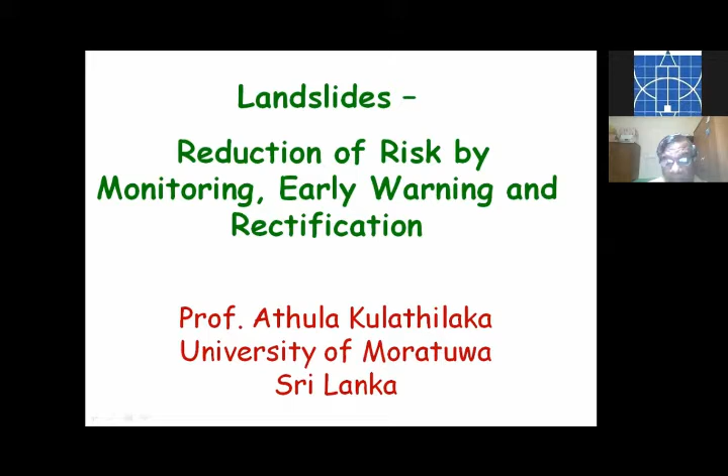A landslide is defined as the movement of a mass of rock, debris, or earth down a slope. These movements are generally inconvenient and could be of disastrous proportions, leading to loss of life in certain situations. They are a source of concern for geotechnical engineers and engineering geologists, so we have to find solutions for that.

These mass movements can be subdivided into three categories from a mechanistic point of view, for our analysis: slides, flows, and falls.

In a slide, the moving mass comes down with a discrete boundary shear surface without any disaggregation inside. As one unit, it comes down with less internal deformation, and it can be translational, moving in one direction, as seen here. Long infinite slopes may fail like this due to heavy rainfall, or at bridge abutments and in reservoirs due to drawdown of the water level.

You can see this kind of shallow translational slide here in Samanalawewa reservoir. It can also be rotational, with a circular or compound surface having both circular and non-circular components. So that's the different forms of slides.

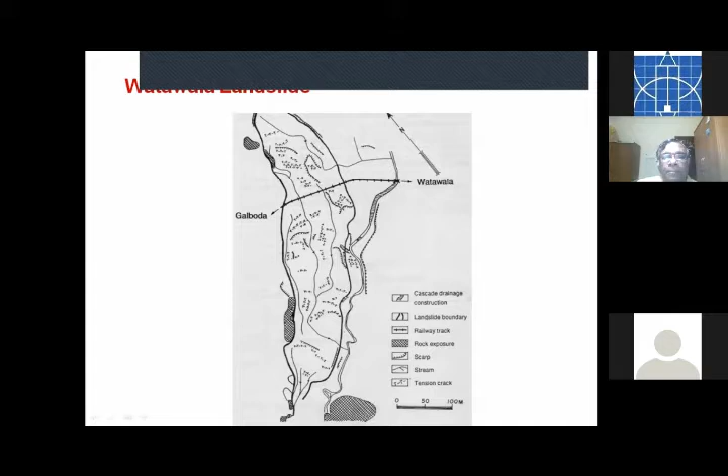So this shows the landslide boundary identified by numerous investigations and the railway track there. The railway track was getting disturbed by this slide, and this is the identified failure surface. This mass was moving down due to the rise of the groundwater table during the rainy season. It started around the 1950s, and year by year it has gone down directly without full disintegration, and this movement is causing subsidence in the rail track and things are getting disturbed. So this was rectified in 1994.

I will talk about it later, but what I'm illustrating here is this is a slide. It is moving down with the whole mass being intact.

In the case of a flow, the material becomes disaggregated and the mass moves down without concentration of the displacement at the boundary. So one that started as a slide can propagate and the whole mass can flow down as a debris flow. That is what happens in Sri Lanka in most of these rain-induced landslides.

In a fall, it is a toppling mechanism. It falls normally from the steep face of the soil or rock, with immediate separation. So the debris is collected and can come down as a flow.

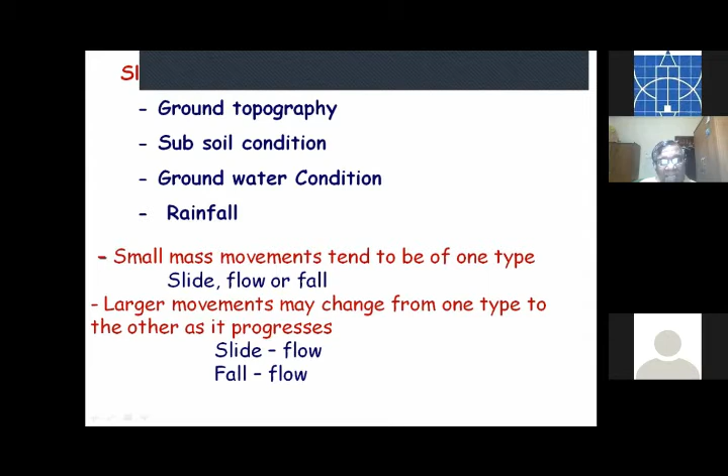The type of instability mechanism that could take place in a particular slide will depend on the ground topography, subsoil condition, groundwater condition, and rainfall. Small movements can be of one type - it may remain as a slide, flow, or fall. But in large movements, what started as a slide can end up as a flow. Falls, debris collected by a fall, can come down as a flow. As I said already, in all the rain-induced large catastrophic landslides in Sri Lanka, it starts as a slide and ends as a flow.

The analysis - as engineers, we have the responsibility of analyzing these situations and coming up with certain numbers. There are two approaches that can be used to analyze the stability of a slide. We can do it deterministically by calculating a factor of safety.

There are two approaches, the limit equilibrium approach and the finite element approach. Limit equilibrium approach is the one most widely used. There we have to assume a potential failure surface. In the finite element approach, we don't have to make such an assumption. We do a stress analysis and come up with the factor of safety. I will elaborate now.

In the finite element analysis, we discretize the material into certain elements and assign the appropriate constitutive laws for the different soil strata, then simulate the construction. It may be building up of a slope or excavation in the ground to make it a slope, or in the case of a natural slope, you can do a gravity turn-on analysis. With that, we calculate the deformations at the nodes and the stresses in the elements, and we can graphically present that as stress contours or displacement vectors in this form.

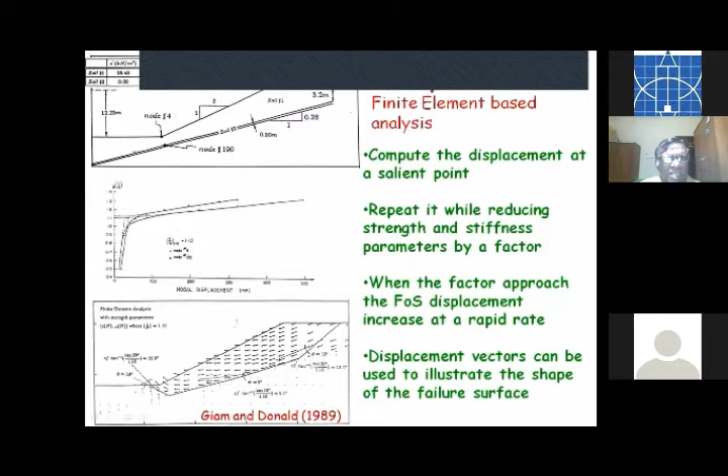If you check the displacement vectors corresponding to that stage, you get vectors like that. By encompassing the large value vectors, you can see that is the potential failure surface in this soil where there is a weak layer. Previously I showed a case of uniform material. Here, with that weak layer, the potential failure surface is not circular - it is of this type, a wedge type surface. Now that understanding is important when you go to talk about the limit equilibrium approach.

In a limit equilibrium approach, we have to assume a trial failure surface, which can be circular or non-circular based on the subsoil condition, and consider the force and moment equilibrium. There are different methods available, Bishop's, Janbu's, and all that.

In the Bishop's method, we can consider only the moment equilibrium, but the other three methods can go for both moment and force equilibrium. In Bishop's method, we can assume only a circular failure surface, but in these other methods we can assume other forms of failure surfaces as well.

If we assume the failure surface to be circular, a circle can be defined by a center and a radius. We can change the center along this grid and assign different radii, and the program will analyze and come up with the critical failure surface, with a factor of safety of 1.16. But if we account for the geological situation and let the program analyze non-circular failure surfaces, the answer is 0.742. So this is the correct answer.

So by not properly making that judgment and not directing the software to do the appropriate type of potential failure surface analysis, we can end up with gross error in our final calculation. It is very important to make that engineering judgment so that the software can play its role.

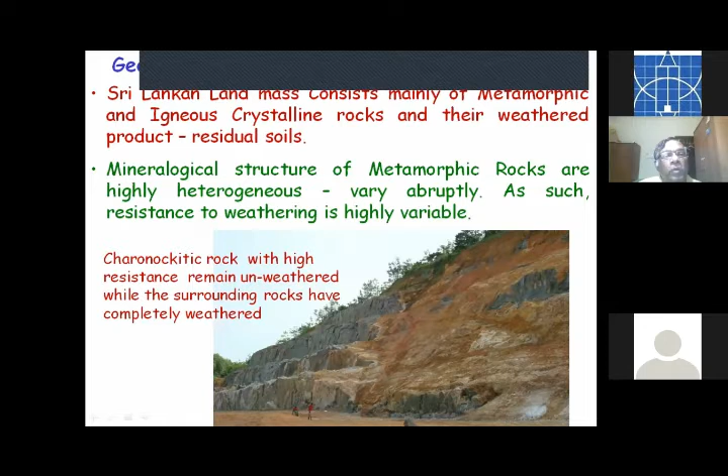So in a slope, Charnockitic rocks, which have high resistance to weathering, can remain unweathered as you see here, while all the surrounding rocks of other types have completely weathered. An even more variable situation can be seen here.

There are Charnockitic rocks in here, and these gneiss rocks have weathered into a lateritic type soil. Then the rocks with high feldspar content have weathered and formed this whitish clay material, which is highly erodible and quite sensitive.

So such highly variable situations can be seen in the sloping ground in Sri Lanka. Unfortunately, all these cannot be detected by a few boreholes, so when the top is exposed, only then are all these complicated situations revealed.

In these rocks, we can have joints, as seen here, a jointed rock with closely spaced joints. When the rock weathers and the weathered product remains at the same position, these joints will remain as relic joints. So the presence of relic joints can also lead to critical situations in a residual soil.

As we discuss now, our landmass consists of colluvial soils - that is, if a residual soil has come down due to a previous landslide and deposited somewhere, we call it a colluvial soil, which is particularly weak material. Then there are residual soils remaining intact at the position of the parent rock, and rocks of different levels of weathering. So all sorts of these combinations can be present in a slope.

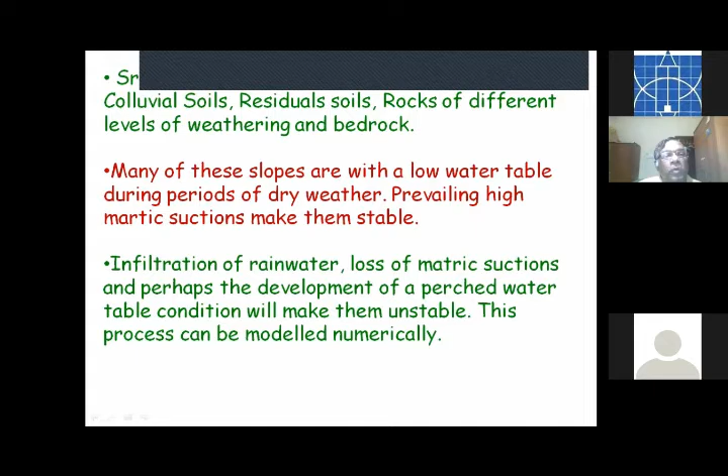In many situations, during the dry period, the groundwater table is low. Therefore, in the unsaturated soil, there are high matric suctions. With the infiltration of rainwater, these matric suctions are lost, and perhaps a perched water table situation can develop, which can make the situation become unstable. I will elaborate on it in a few slides.

This is a steep vertical cut done in the Kandy Road at the Kegalla bypass. This is soon after the cut, back in 2014, and it is looking very nice, not yet exposed to any rainfall. Soon after, with a few rainfalls, it has failed. So this is the failed position.

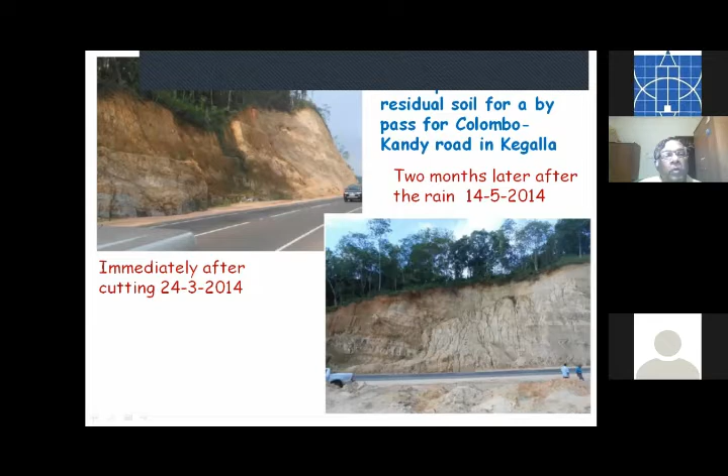Talking about the fundamentals of unsaturated soils - in a saturated soil, you have only solids and water.

A water molecule at the edge of the boundary has an unbalanced force towards the water, so that creates a tensile pull in this contractile skin. Inside, the water forces are balanced. So this tensile pull makes a difference in the air and water pressure.

Air pressure is generally greater than the water pressure. Air pressure is atmospheric, so the water pressure is less than that, in negative.

In the soil mass, the spaces in between the particles can be considered as interconnected capillary tubes. So this surface tension effect has a compressive force on the walls of the capillary tube, that means on the soil surfaces. So that compressive force is generated by the surface tension, that capillary action.

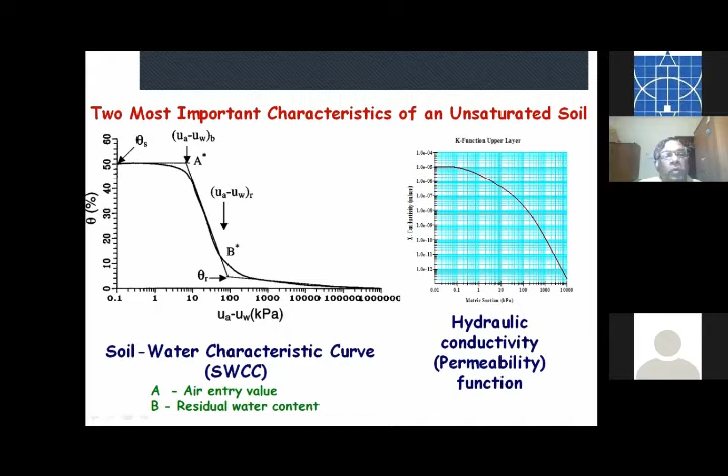We have done that for different types of soils in Sri Lanka, and the variation of permeability with matric suction can be found experimentally or can be related to the soil water characteristic curve. So when we model the seepage, the flow of water, infiltration of water into a soil, these two characteristics are very essential.

Here I show you some results of such modelling. This is a typical cut slope taken from typical southern expressway slopes, and this is the groundwater table. Over here, it can be either uniform soil or soil overlying a layer of rock. I have considered these two situations.

This is the case where you saw highly non-uniform conditions in these slopes, but we cannot analyze such a situation with all that complication, so we'll have to idealize it as a uniform slope.

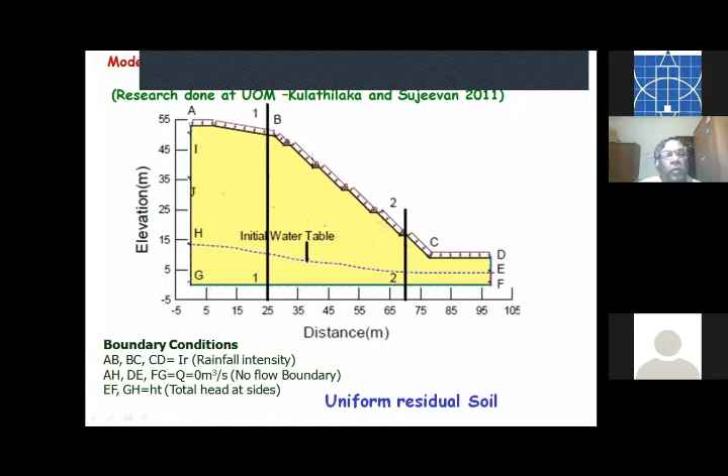So that is the groundwater table, and infiltration into that is modeled. In this case, there's a rock layer underneath that residual soil layer, with a 5 millimeter per hour rainfall occurring over a few days.

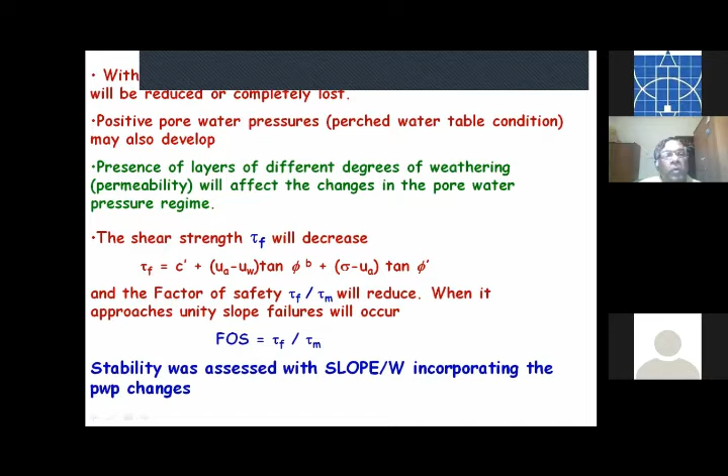So with that, I illustrated how the pore pressure regime changes, how the matric suction is lost, and the perched water table conditions may develop during rainfall. The shear strength is given by this particular equation. With rainfall, UA minus UW is reduced or lost, and positive pore pressures can develop. Therefore there is a reduction in tau F, and the factor of safety will reduce. As time progresses, under different intensities of rainfall, there is a reduction of the factor of safety, as illustrated there.

In a slope made to a gradient of 1 to 1, if you flatten the slope to 1 to 1.267, still this infiltration causes the reduction of factor of safety. So lowering the slope angle is not the answer to this kind of situation.

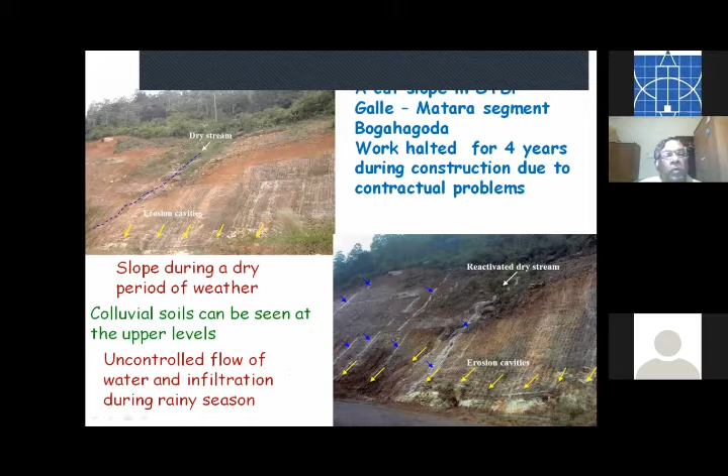So these are the potential failure surfaces, and this is the practical situation that occurred in the Southern Expressway. This cut was made in the Galle–Matara segment, and due to a contractual problem, work was halted for about 4 years, so no drainage measures were implemented. There was water moving down the slope and infiltrating into it. You can see some colluvial soils there, whitish clay soils over here. So this was going on in an uncontrolled manner for a few years.

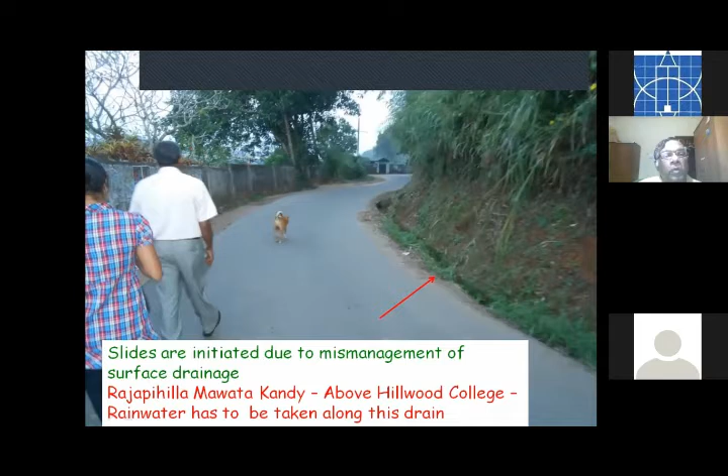This is another interesting situation, a slide that took place due to mismanagement of drainage in Kandy, Rajapihilla Mawatha, where Hillwood College is down there. The surface of the road is cambered so the rainwater flows along it, but at certain places it is not properly maintained and there is not enough capacity for drainage. So the water flowed onto the other side of the slope, and the water flowing into that disturbed the soil and infiltrated into it, causing this failure.

So this is unstable. This debris has to be removed, and for the safety of the school, the slope had to be rectified with soil nailing, spending more than a few millions of rupees, which would have been avoided if proper attention had been paid to the drainage.

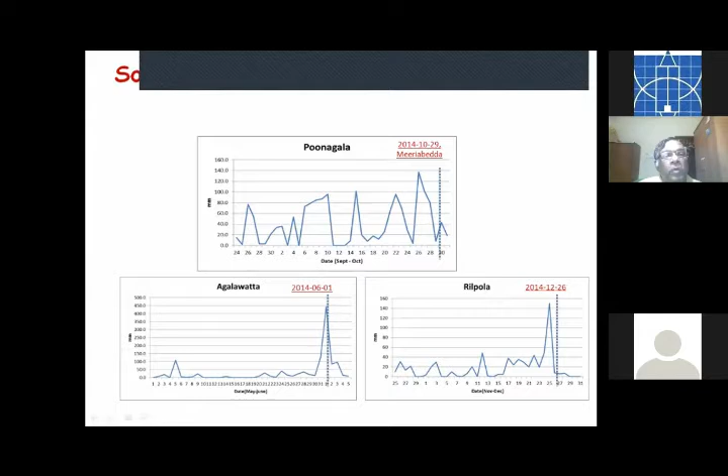In natural slopes also, we are all aware that major failures take place during periods of heavy rain. This corresponds to some such failures, the rainfall record, and the failure took place on this marked day. This is one such situation in Meeriabedda, the initiated failure. This is a famous failure causing many deaths, and that is where the slide started, the initiation of the slide.

So what do we do with the landslide? What are the possible actions? One thing is avoidance: we have identified the suspected area, don't go there, just leave it alone. But that is not always possible. The other possible mode of action is acceptance, to live with the landslide - get to know that there is a landslide and live with it.

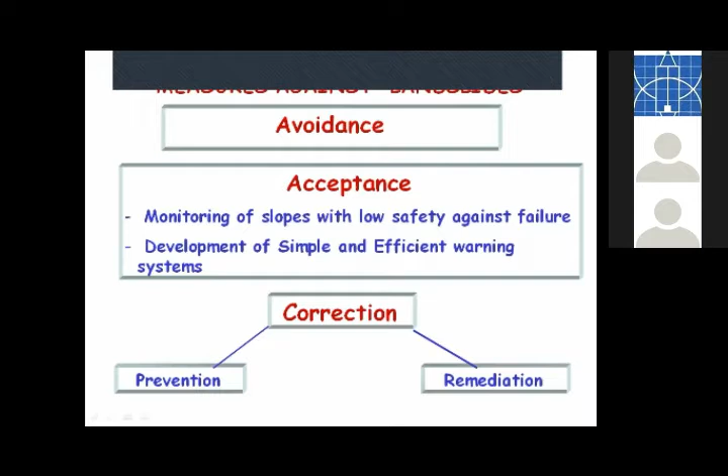If we can rectify each and every landslide, that is the best situation. But when it is not practically feasible, we'll have to live with that situation.

NBRO is the government agency dealing with landslides in Sri Lanka, and they have various strategies in landslide risk management. I work very closely with NBRO in many of these activities. The first activity is the identification of hazards, the zonation map, the landslide susceptibility map, which I will elaborate on shortly. Then they are involved with landslide monitoring, early warning, and awareness campaigns. In major projects, landslide risk assessments are done, and there are investigations and analysis for mitigation in special projects.

Talking about landslide hazard zonation mapping, we consider the possible reasons contributing to landslides, like bedrock condition, bedrock geology, soil cover thickness, soil type, slope range and angle, hydrology, land use, and land forms. These different contributory factors were given different weightages based on expert knowledge and various statistical principles, and combined to form a hazard zonation map.

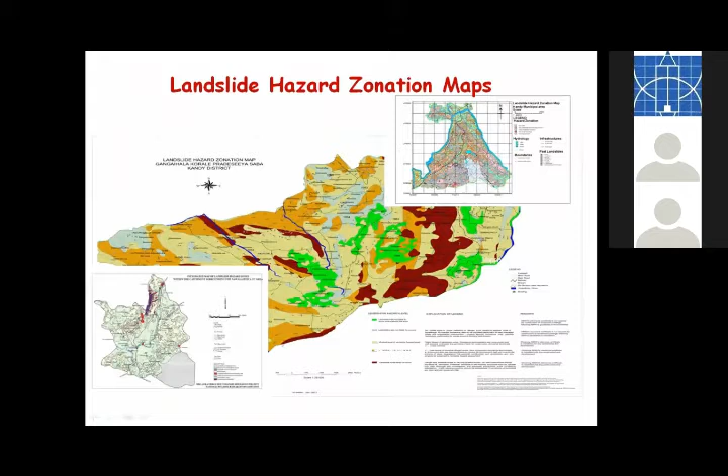This is a particular hazard zonation map, with different hazard levels marked in different colors. Taking this one for the Aranayaka area, the famous Aranayaka landslide, this is the identified high potential zone with high susceptibility to landslide, already identified, and this is the marked flow path of the debris — the area under risk. Earlier, with the Meeriyabedda landslide, I showed you that path under danger. So from the hazard susceptibility maps, risk maps are to be developed, identifying those areas under risk, and that is currently being done.

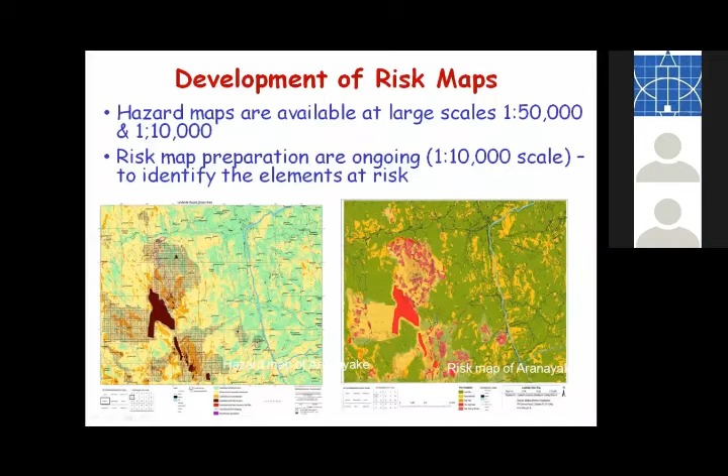Then there's monitoring. For monitoring of landslides, real-time forecasting is an important aspect, and rainfall is the main triggering factor. There are now 325 automated rain gauge stations stationed in many of the critical parts of the country. The rainfall records come automatically to NBRO and are then shared with the Disaster Management Center.

Based on the rainfall, for identified susceptible zones, alerts are issued. Initially, alert is at a rainfall intensity of 75 millimeters per day, warning at 100, and evacuation is recommended with 75 millimeters per hour or 150 millimeters per day values. These numbers were arrived at based on past experience and various statistical information.

As we discussed earlier, this threshold rainfall value for a slide at a particular location is site specific. We have to do a detailed analysis of the site to find the threshold rainfall value, but such an analysis cannot be done for every suspected slope. So there is general guidance, but we can do more detailed analysis for identified critical slopes. Now we are going to start a research project to get threshold rainfall values in certain identified regions and to predict the flow path as well.

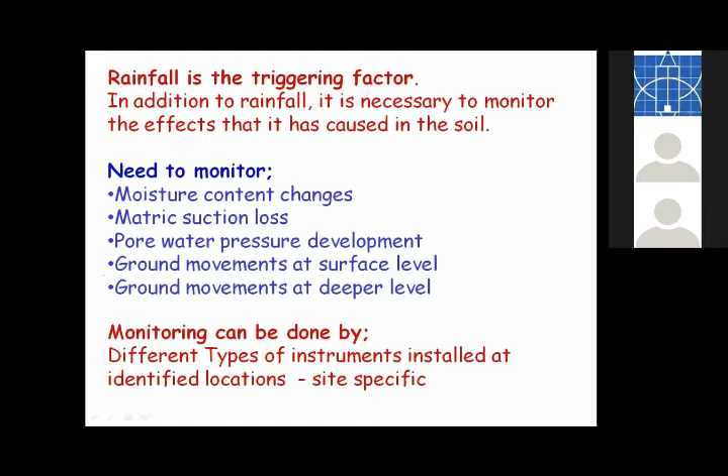In addition to rainfall, it is necessary to monitor other parameters — the effect rainfall has on the ground. With infiltration of rainfall, as I showed, moisture gets into the soil, moisture content changes, there is loss of matric suction, pore pressure develops, and there are movements at the ground surface and at deeper levels. All this can be monitored with various instrumentation. At a potentially hazardous site, you can identify the different soil layers where it is problematic or critical, and install these instruments at appropriate locations. I will elaborate with some figures.

To measure the temperature change of moisture content, you have the moisture sensors. Then to measure the pore pressure, the matric suction change, tensiometers, piezometers, and to measure the ground movement, we can have extensometers, tilt sensors, and strain gauges.

In all these, the data can be acquired electronically and transferred to a control station without visiting the site. So you can monitor the slope from the office if proper instrumentation is installed. Then there are inclinometers which are capable of identifying the failure surface at a deeper level. I will elaborate on that as well.

Most appropriate way is through a piezometer. In our residual soil formations, there are soil layers of contrasting permeability, so the pore pressure development and dissipation in these layers will be very different to each other. So it is necessary to identify the pore pressure at different layers. We need to install at a critical site pore pressure piezometers at different levels.

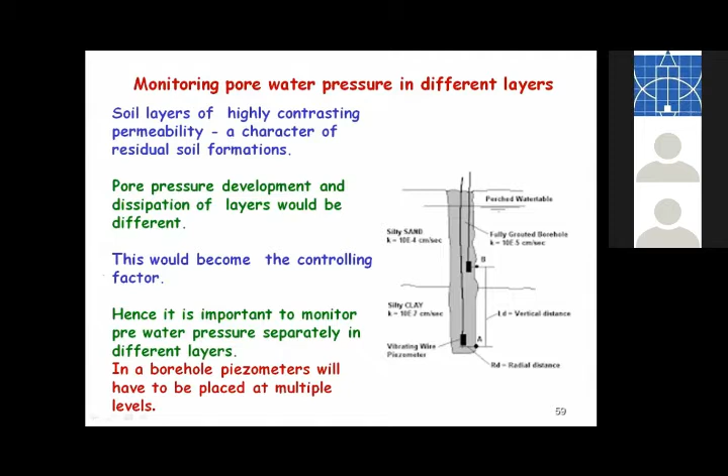Piezometers can be of different categories. The simplest is the standpipe or Casagrande type piezometer, where you have a porous tip or a perforated tip, and with the rise of the water table, the water will rise along that to balance the pore pressure at the tip, so you have to measure the water level through a probe that is pushed down. There is some time needed for water to move into that, so the response is slow.

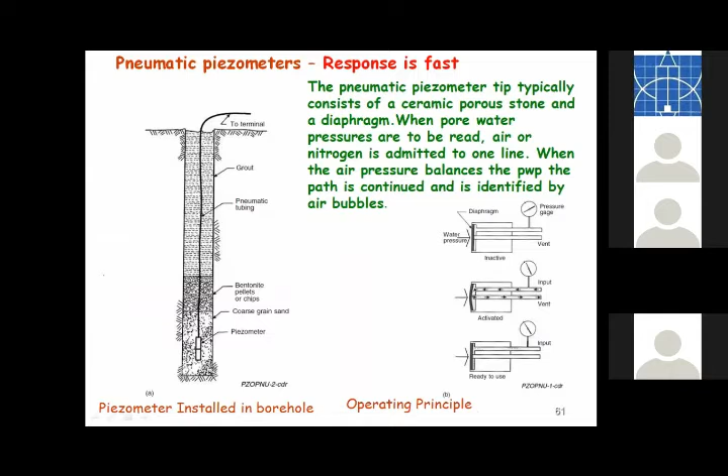There are other devices like the pneumatic piezometer. The response is much faster. There is a porous stone and a diaphragm, and when you want to measure the pore water pressure, nitrogen or air is entered at a certain pressure, so that will open up the diaphragm and it comes back, and you can record the pore pressure. So there is no need of movement of water, so you can get the pore pressure measured rapidly.

In a vibrating wire piezometer, again, there is a filter and a diaphragm, in contact with the pore pressure regime. The water pressure measured there has an impact on the diaphragm, and it changes the length of the wire and its resonance frequency. So it is picked up by a signal and converted to the pore pressure. All these will react very fast and are ideal to monitor the pore pressure building up and dissipation in a landslide situation.

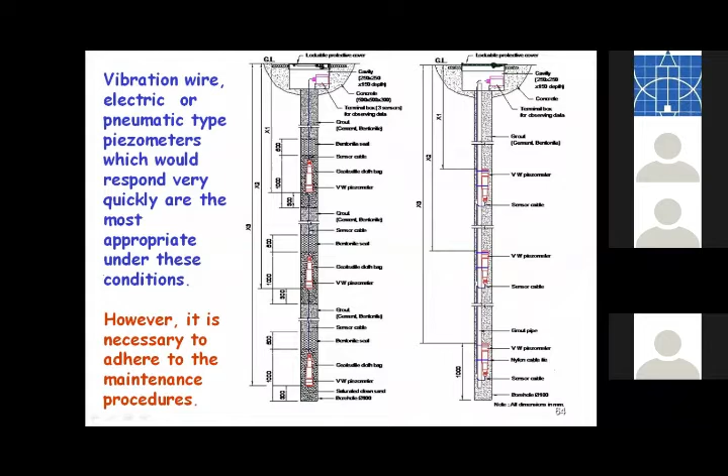So in a borehole, with different soil layers identified, you do a site investigation, identify different soil strata that can be critical, so the piezometers can be installed at different depths.

The other point that we were talking about is the matric suction. The matric suction is measured with tensiometers, so that negative pore pressure can be measured directly, or you can measure some other parameters related to it. When we measure the matric suction directly, we call it the tensiometer, and conventionally we can measure up to about 100 kilopascals matric suction directly.

In a tensiometer, we have a porous tip, a high air entry disk, and that gets in contact with the soil with that negative pore pressure. So that soil tension will have an impact on the diaphragm, and that effect is measured by the devices here. There are devices of different content: the reservoir is small, and this is the tensiometer that we use in our research work. There's a large water reservoir.

In all these situations, it is very important that you prevent air from entering. In the unsaturated soil, there is air; entrance of air should be prevented. So you have to have a high air entry disk. If you expect 200 kilopascal matric suction in a soil, you need to have a disk with air entry value greater than 200, so air cannot enter.

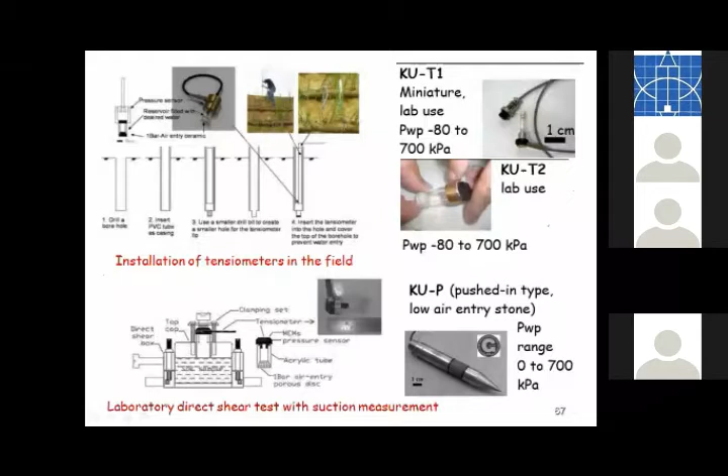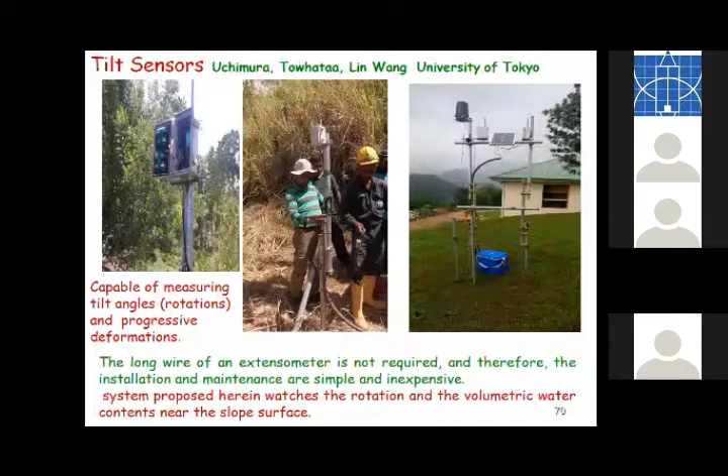A tilt sensor is a smaller, simpler device used for this purpose. You can see this instrument installed at a shallow depth. It is capable of measuring the tilt in the surface and the progressive deformation, and the data can be transmitted electronically. Volumetric water content measurements are also generally installed here.

You can see the installation. So the tilt or deformation and the water content change can be transmitted electronically to the control station.

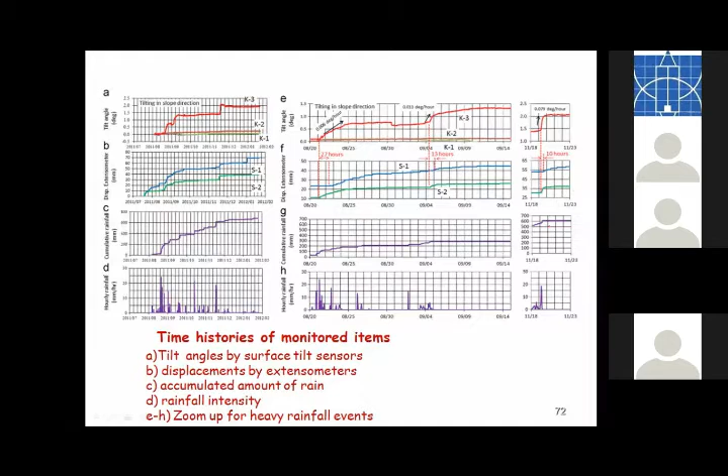So this is a certain result. With this heavy rainfall indicated here, in a tilt extensometer, large movement has been initiated. In a tilt sensor, large movement has got initiated due to this rainfall. So when we have these instruments located at appropriate positions, along with the measurement of rainfall, we can connect them up and see whether the movements have initiated or whether there is a danger of a slide.

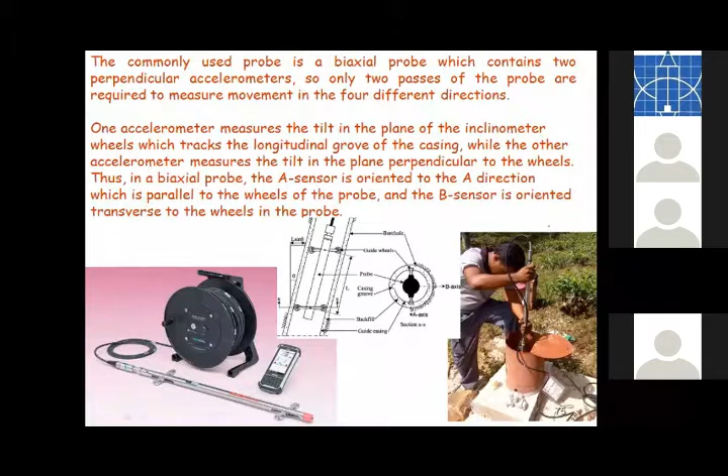So this is the probe, and that is the inclinometer tube with two axes of movement. This person is lowering it into the inclinometer tube within the borehole and identifying it. The change of angle can be identified and transmitted electronically to the top, and you can identify how the changes are happening - the deviation from verticality can be identified.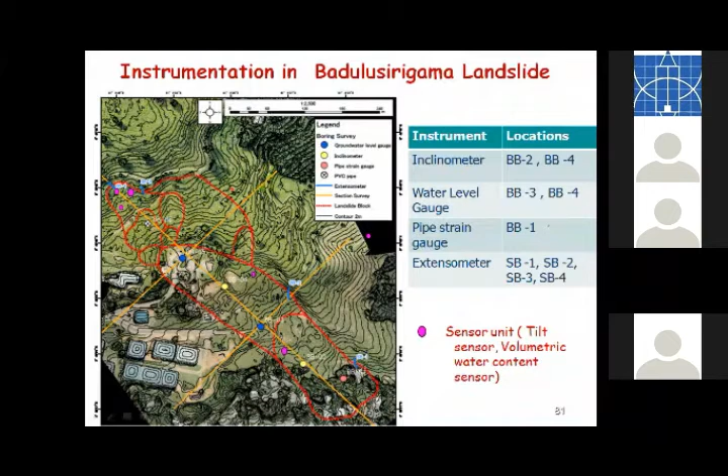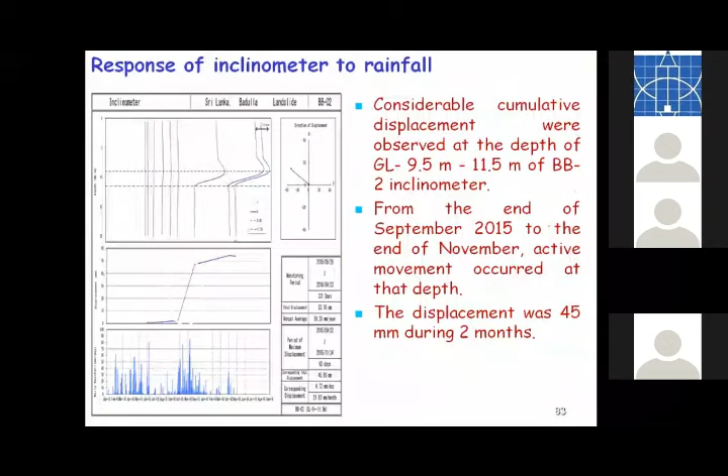Large deformations were identified in the extensometer. And in the inclinometer, with this rainfall, you can identify that deformation happening. In the strain gauges, you can see with that accumulated rainfall, the deformation - it is straight here, but the deformation started after the rainfall.

So that is site-specific monitoring with installed instrumentation. There is a global way of doing that using satellite data - the interferometric synthetic aperture radar, InSAR technique, which has been used to identify the global variation of deformation. By using images taken at different time intervals, a three-dimensional terrain model can be generated.

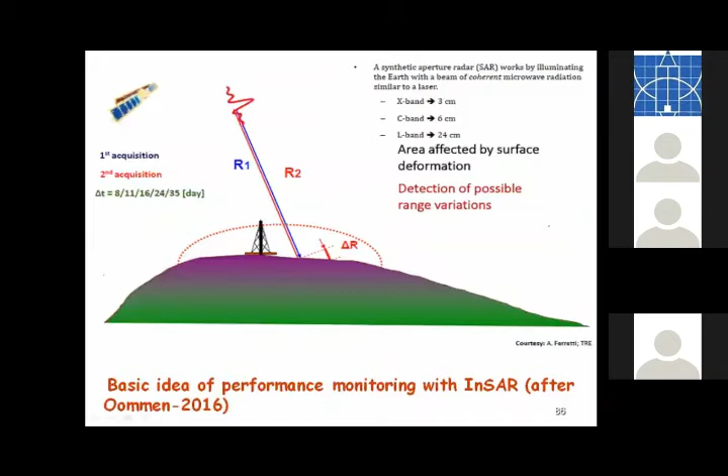Aerial photogrammetry is another tool that can be used here. We take photographs with more than 60% overlap. Two overlapping photographs can be used to create a three-dimensional model of that area. Nowadays we have drones taking digital photographs and combining these overlapping photographs in an analytical photogrammetry exercise with various software, you can create the three-dimensional ground model at periodic time intervals, and you can see what changes are happening in between.

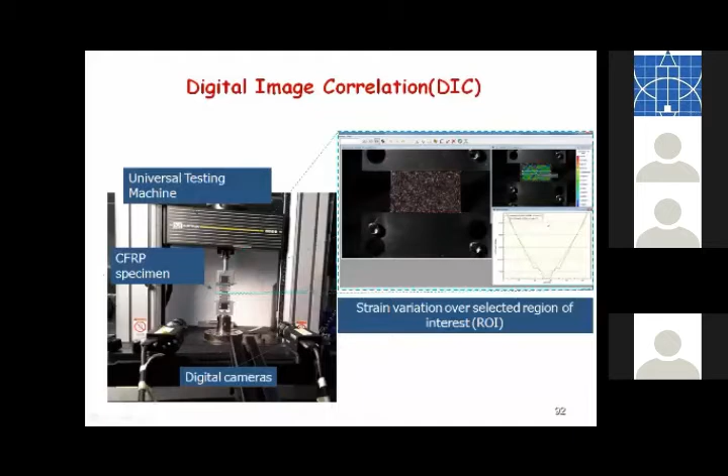Terrestrial photogrammetry is where the photographs are taken with the horizontal axis. On a sloping ground, you can take photographs with the horizontal axis of the camera overlapping and create a three-dimensional ground model, doing that periodically to find out any deformations within a certain time period. That technique is used in structural engineering - here a thin element is loaded and watched by two cameras. Using this, you can create a three-dimensional model of the deformation of that element. So without fixing strain gauges, which will influence the behavior, you can watch it with the two cameras and a three-dimensional model can be created of the deforming object, and necessary analysis can be done.

Right, that's about the monitoring.

So if we find the landslide is taking place, what can we do? How can we rectify it? Terzaghi says we have to attack the actual cause of the slide. So it can be done by modification of the slope geometry, drainage, retaining structures, and internal slope reinforcement. In modification of geometry, we may remove material from the sliding area and add it to the toe, or change the slope geometry.

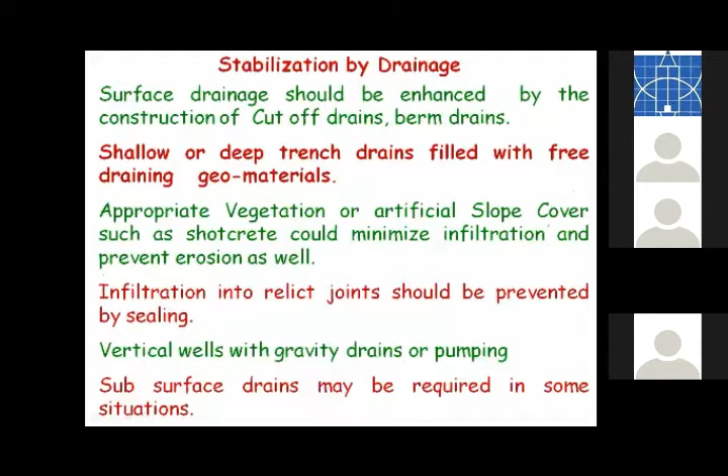But in our situations, mostly these landslides are caused by rainfall, so therefore the focus should be on reducing infiltration and getting the pore water out. We have to focus on improving surface drainage and subsurface drainage. Surface drainage can be improved by cut-off drains and berm drains. At shallow levels we can use trench drains, or infiltration into relict joints must be minimized, and subsurface drainage may be required in certain situations.

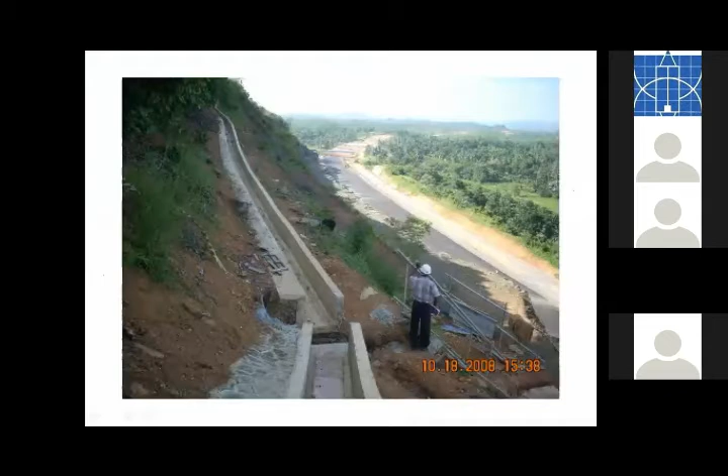Here again, an illustration of a berm drain connecting to a cascade drain taking water down - this is to prevent splashing of water into the rock. This is another critical location in the Southern Expressway. So there are these berm drains, and there's a lot of water coming from further up the slope, right? So there are these cascade drains coming up.

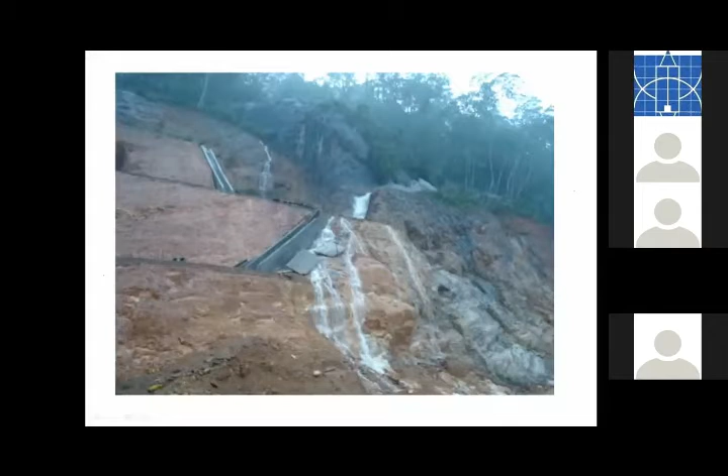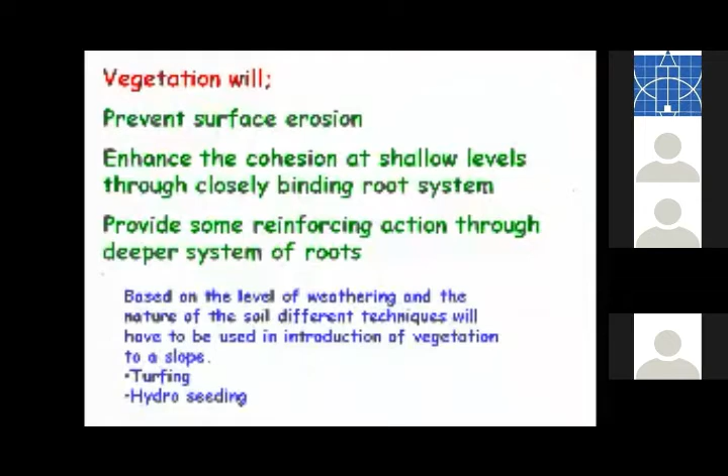So the vegetation can be introduced by turfing or hydroseeding. These are some such exercises. Hydroseeding, and this net protects it till the seeds are grown. Turfing, when the level of weathering is quite high, turfing may be successful.

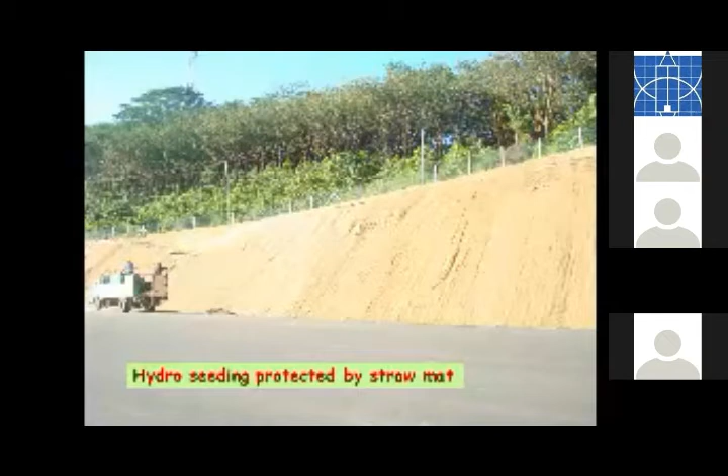This is again hydroseeding. Hydroseeded, and that is covered with the straw mat, and they are doing the watering, and little by little the plants are grown. So now you don't need the straw mat; it is capable of providing the erosion protection.

So in many cases, the surface drainage may not be sufficient. We will have to go for subsurface drainage measures. We may have trench drains, like that.

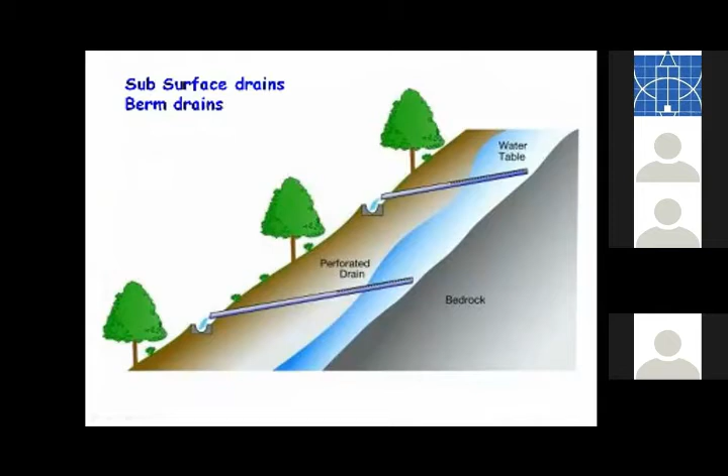And these kind of sub-horizontal drains, pumping wells. Sub-horizontal drains drilled to a particular distance with perforated pipes. Water here is captured by that and finds an easy path. So we'll have to install them at regular horizontal intervals.

Sometimes we may have to do things like a drainage well, then drill in different directions and install wells as shown here. So depending on the prevailing situation, we have to find the appropriate way of installing the drainage.

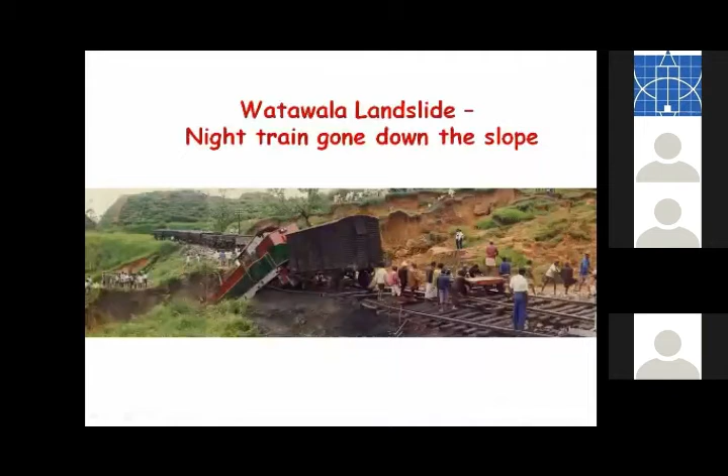In the Watawala landslide, which was stabilized completely by drainage measures, there were surface drainage measures, pumping wells, and in the long term, directional drains under the identified potential failure surface. So these are the surface drains, pumping wells. These are photographs taken somewhere back in 1995.

And then, more importantly, this is the identified failure surface which I showed you earlier. During the rainy season, the groundwater table level will rise up to that due to the rainfall. So then movements will initiate along that.

So the movements there have happened over a long period. The shear strength has come down to residual. So that is the potential moving line, the one which has to be protected. Therefore, the subsurface drains were taken just underneath that.

Now that is too long, about 35 meters deep, so you can't have one directional drain. You have to handle the failure surface. So the directional draining technique was used.

Subsurface drains were taken along that path, and to cover the planned area, there were 13 such drains done. In those drains, HDPE pipes, which have high resistance to deformation, were inserted. There are perforations from region to region, allowing the water to come in.

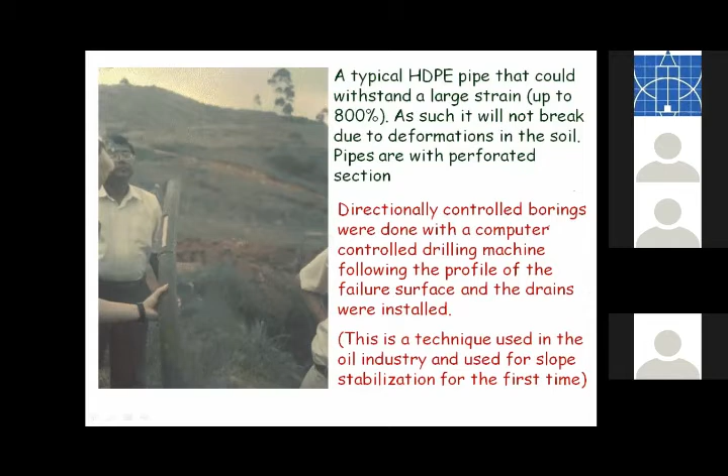And so this is the drilling technique used, and that is the outlet of the drain. Photographs taken in 1995, soon after the completion.

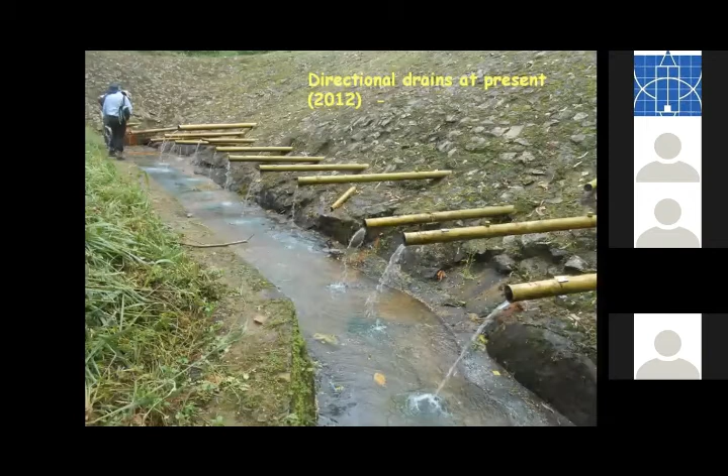And this is the situation of photographs I took in 2012. So they are still in operation. There are some complaints of blockage, but yeah, it is still in operation. There are, of course, some issues to be answered. This is one of the pumping wells and the railway track.

In the Budulusirigama landslide, which is again rectified by drainage measures alone, this is the identified surface that I showed you before.

Through investigations, 3 potential failure surfaces were identified: the lower one, middle one, and the upper one, and also they can be combined to make one composite failure surface. So these are the drainage measures implemented.

Blue lines are the surface drains, and then at different elevations, fan type drains were done. From one location, drains were done for about 40-50 meters in a fan type orientation, and the water is collected, then taken away.

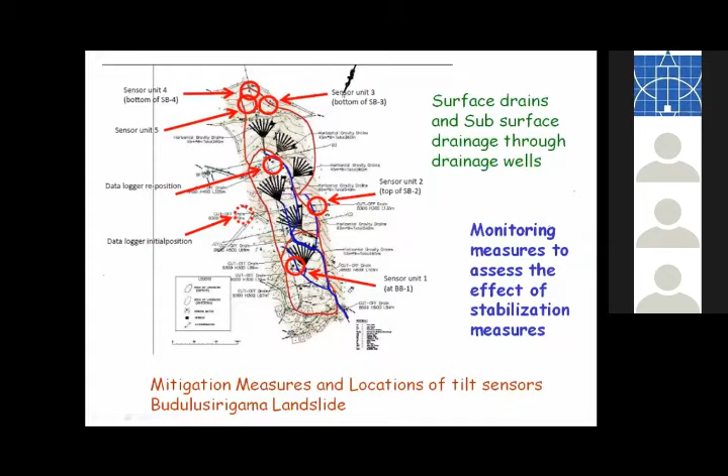Now, this is the measure of the surface drainage, and these are subsurface drains. A number of the water collected from those fan type subsurface drains were collected and taken away.

Now this was modeled in the master's work, Nilanka's thesis, and these were the different levels where these things were installed. It was idealized into a 2D situation, and the installation of these drains and the drainage of water away from those drains was modeled.

And now in here, there were no other activity, only the installation of drains, so no cutting or filling activity. So they could have been installed starting from the bottom going up, or starting from the top going down.

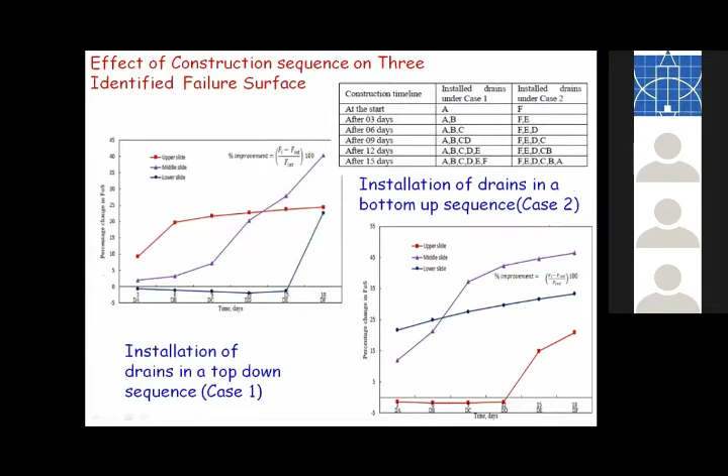So we investigated 2 possibilities. If we do a top-down construction, the factor of safety of the 3 identified failure surfaces, the top one enhances first, and the bottom one enhances very late. If you do a bottom-up construction, the lower failure surface gains factor of safety very fast, while the upper one happens much slower.

If you consider the composite failure surface, top-down construction brings it to that value. Bottom-up construction brings it there too, to the same value, but in the bottom-up situation, you can see the factor of safety gain is faster. So if you start installing drains from bottom up, the factor of safety is gained faster.

Then after that, we impose a critical design rainfall on this rectified slope and check what will happen. That is the rainfall record. You can see with this rainfall, there is a drop in the factor of safety in all 3 potential failure surfaces, but with the cessation of the rainfall, factor of safety is gained fast. So it has not led to a value less than 1.

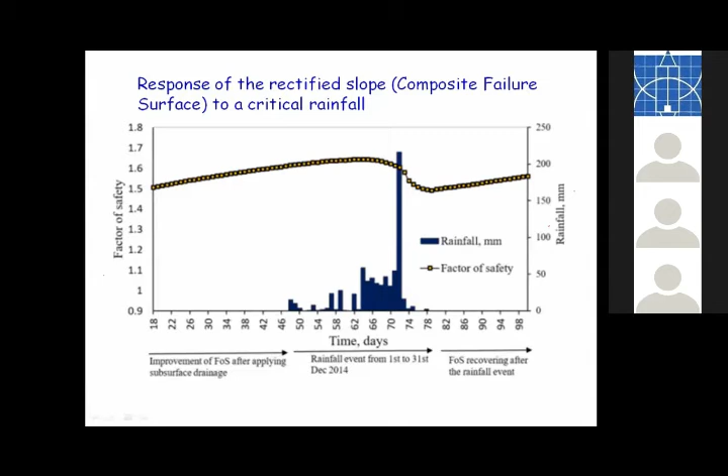With the composite failure surface, again that was checked. This is after the installation of drains. When the drains are working, factor of safety is picking up, and with the rainfall, there is a drop, and it is picking up again with the cessation of the rainfall. So you'll have to do this kind of analysis to see whether a rectified slope is capable of handling this failure.

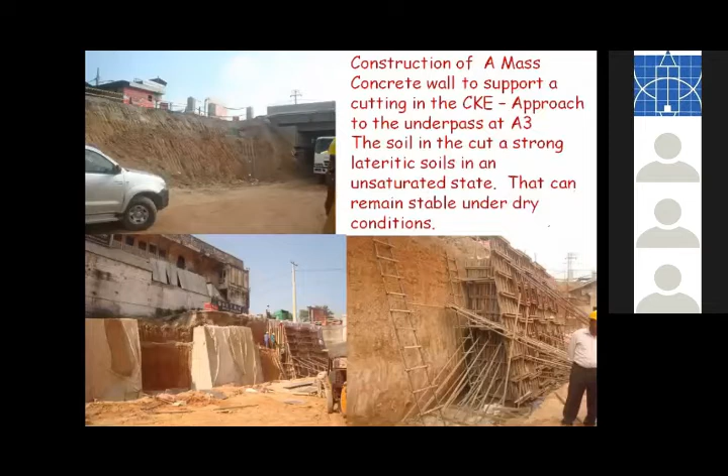In certain situations, in addition to the drainage measures, we will have to have various kinds of structural interventions, like this steep cut slope. It is necessary to have this gabion wall here to protect it, in addition to the drainage measures. Now, in this situation, in the Colombo-Kattunayake Expressway, this steep cut is done, which is very stable during the dry season, highly hard lateritic soil, but you cannot guarantee the safety during the periods of heavy rain. So the excavation is done segment by segment, and this mass concrete retaining wall was constructed.

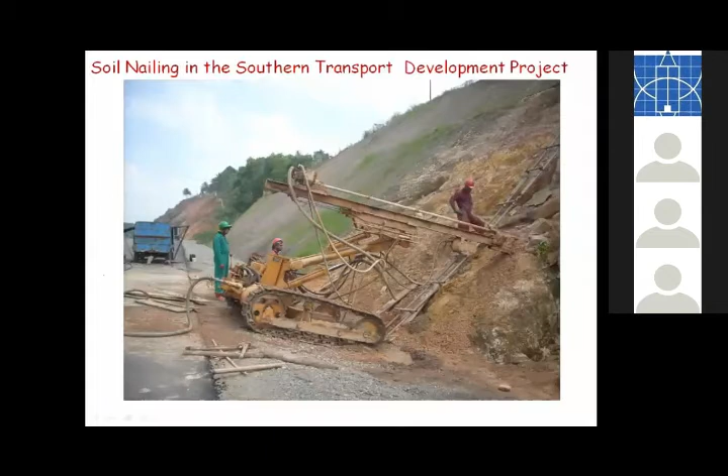And so this is the construction sequence of a nailing, showing the drilling of the hole, inserting of the reinforcements, grouting starting from the bottom, and connecting them up, and shotcreting, and at the end of it.

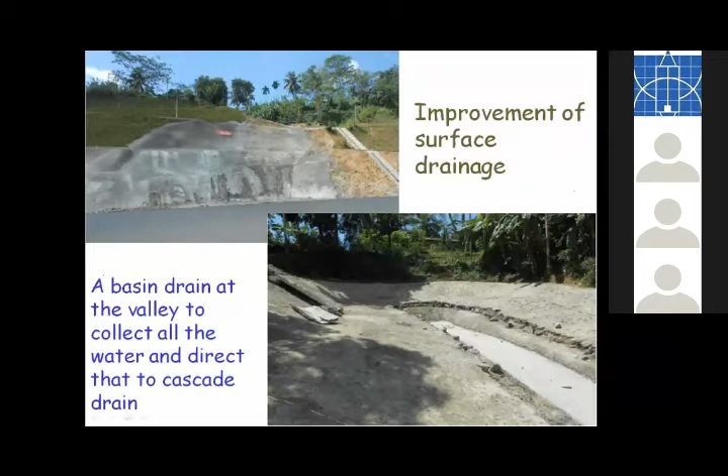So there were many slope rectifications with soil nailing in the Southern Expressway. So this is one such situation, and there's a valley here. There's a lot of water coming into that valley, so nailing alone will not be enough. There is a basin drain constructed here to collect all that water, and that was sent down through a cascade drain to ensure stability.

In certain recent constructions, we did not use full face shotcreting. Instead, nail heads were connected by beams and also connected with high tensile mesh, and vegetation was introduced by the hydroseeding technique. There is a cutoff drain at the top.

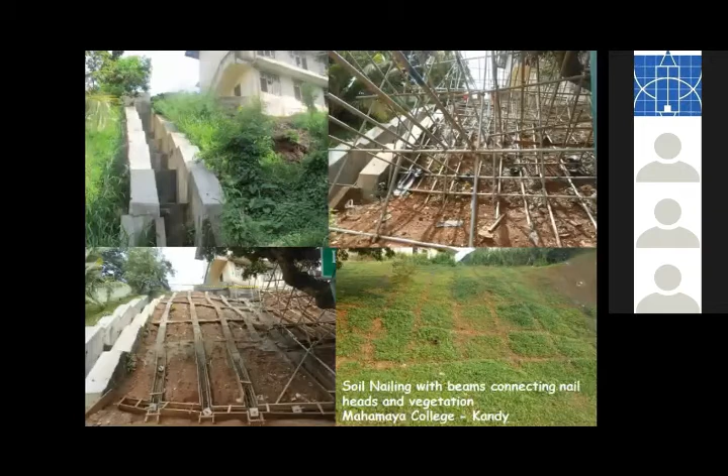The nails were connected by the beams, and in between, vegetation was introduced, so it looks like a natural slope. In many such slopes stabilized on the Kandy Mahayangana Road, we used this type of arrangement with nail heads connected by high tensile strength mesh and introduced vegetation wherever possible.

But there were certain situations with highly erodible material where we had to go for shotcreting. Here, the nail heads are connected by a metallic plate along with high tensile strength wire. So these are some examples of that.

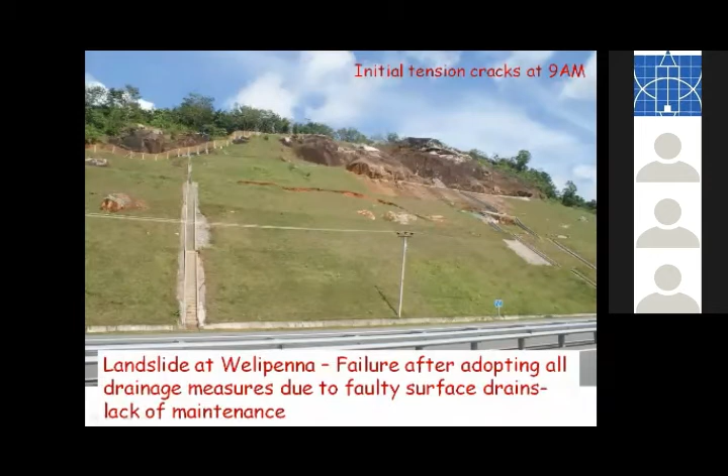Now talking about this failure in the Southern Expressway, you can see this crack appearing in the morning and causing destruction in the drainage lines. By evening, failure had taken place. This was due to a faulty drain here, which was leaking into that area. You can see the failure surface is not very deep.

Whitish clay soils are seen here, and it is quite dry, so the water table has not risen. This is due to development, loss of matric suction, and possible development of a perched water table near the surface. The prevailing situation is not stable, which was rectified by a reinforcing toe retaining structure.

At the top level, much longer reinforcements were required, so we used anchoring here and nailing here. In an anchor, there is pre-stressing; in soil nailing, the nail is a passive element, but in anchoring you need pre-stressing. So this is that configuration.

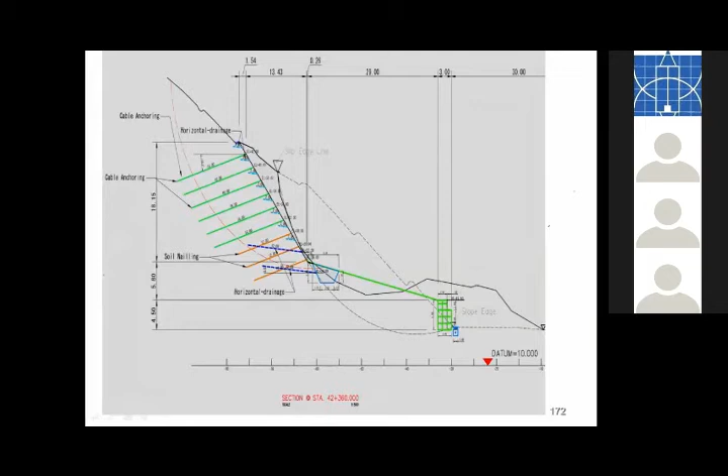These are the subsurface drains used to get the water out, with the gabion wall at the bottom. Drilling and installation of the shotcreting and pre-tensioning of anchors was done at the upper level from that platform.

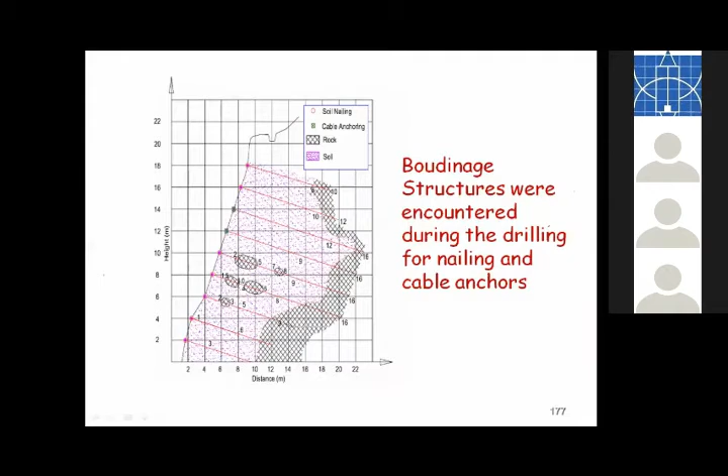In the drilling process, we encountered boudinage structures and rocks, but we had to drill through them to the design length, otherwise it would not be capable of achieving that particular strength. We identified there are relic joints in that orientation because when drilling was done, water came gushing out. You can see that person covered in mud.

During the grouting, when grouting was done on a particular nail, it came out at other ungrouted holes, which is proof that there is an interconnected relic joint pattern in there.

So in the construction sequence, we had to plan it properly. The subsurface drains were done last, because if they were done initially, they would get filled with grout. So only after completing all the grouting were those drains done. The water infiltration into the relic joints was modeled like that.

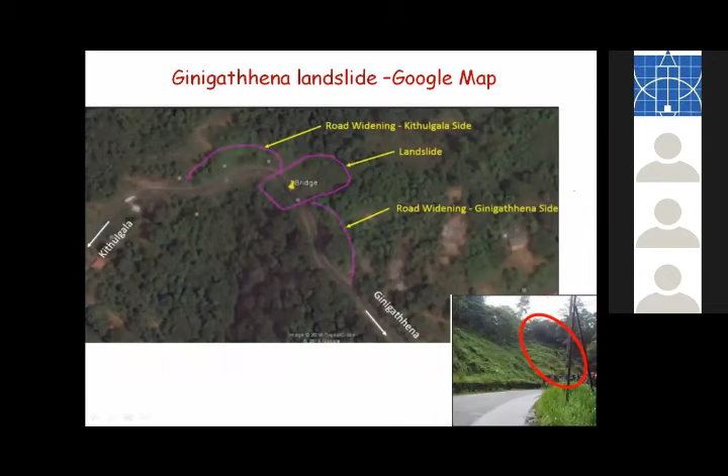In another slope rectification project in Ginigathhena, the road had to be widened. When they started widening it, this initiated a failure, so at that point NBRO had to intervene and stabilize the situation. This is the initiated landslide, which is a reactivation of a previous landslide.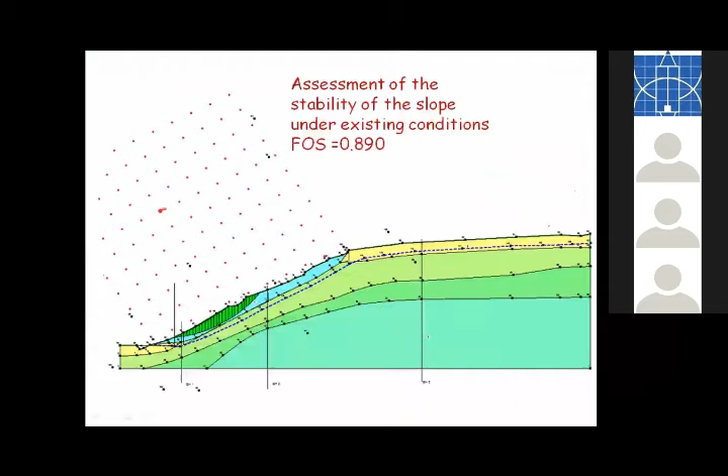When we evaluate the factor of safety in the current situation, it is less than 1, potentially unstable, and the rectification measures include nailing and drainage coming into that. So that is the current profile.

For the widening of the road, we had to excavate down to that distance, so it had to be done from top down. If you start at the bottom, you will initiate failures first. Starting from the top, surface drainage was attended to, then nailing was done, and subsurface drainage was done and propagated down.

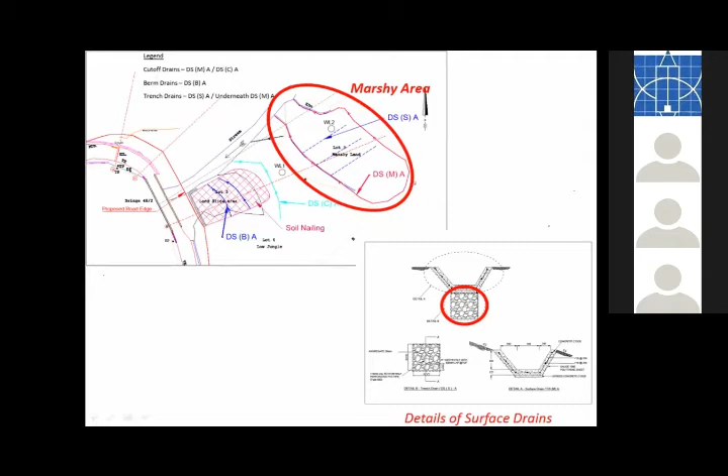These are the surface drainage measures taken at the top with a trench drain and culvert drain, intercepting the water level up to that point. And these were the tubes inserted into these subsurface drains.

So that is stage 1 construction, stage 2, stage 3. The factor of safety was evaluated stage by stage, and with the implementation of these drainage measures, there was a sufficient safety margin in all situations. Now, then we applied a potential rainfall on this rectified slope to see what will happen.

So this is the rainfall applied. With the full implementation, this rainfall did not cause a reduction in the factor of safety. But if we do not have soil nails, no nailing, that will be the situation. If there is no drainage or no nailing, it is unstable under this slope.

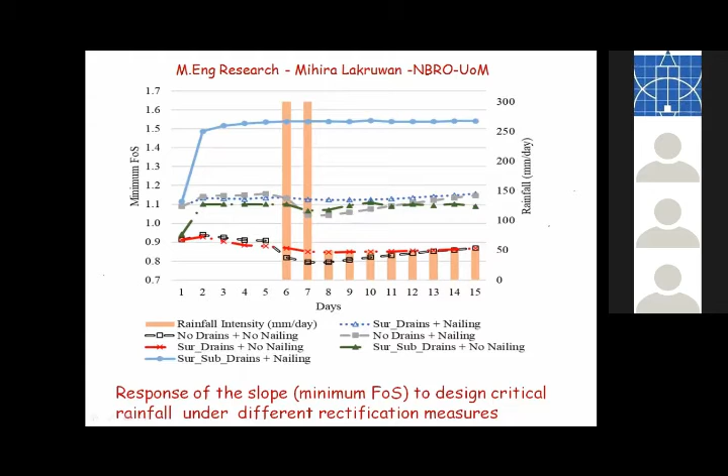So once we implement the drainage measures, the effect on a potential critical rainfall needs to be analyzed. And we check the effect of drainage. So this is if there is no drainage at all in the slope, the factor of safety in the applied situation will be just 1, and we have to have more nails to make it stable.

But with high groundwater table, having nailing will be very difficult. So if you have only the surface drains but not subsurface drains, that is the situation - again you need more nails to stabilize it without drainage measures. So this is to illustrate that in a soil nailing exercise, drainage must be there. Otherwise you cannot implement that or economize it. So this is the final situation of the slope.

Then I will take 2 last cases from Hong Kong. This one, there is this major instability in 1972, which they rectified by drainage measures, surface and subsurface drainage. There had been continuous monitoring of this, and about 10 years back there were some shallow level movements. This area is highly developed, so therefore getting back and doing this drainage alone is not practically viable.

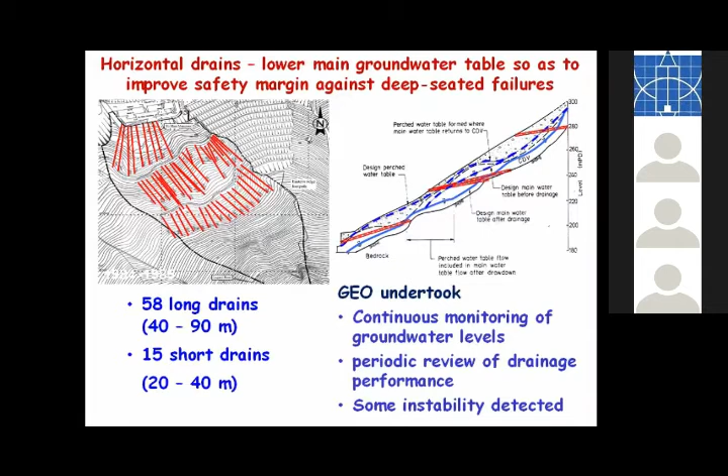So this is the solution that they adopted. At the ground level, bottom level, they did 2 tunnels through rock. From those tunnels, they drilled up these subvertical drains. So the water could be drained out through these subvertical drains. But if they just did that, all the water here would be draining out and it will be another situation.

So they didn't do that. They had a control. From these 2 tunnels, the subsurface drains, the subvertical drains were done there, and they have installed piezometers. These drains will open up only when the pore water pressure exceeds a certain value. If the water table is high it may affect the stability; if all the water is drained out it will jeopardize the whole ecology of the area. So they have the control, allowing the water to drain out only when the pore water pressure rises above a certain value.

So the ground area is maintained. Everything was done with minimum disturbance to that developed area. This is a very pioneering exercise of drainage.

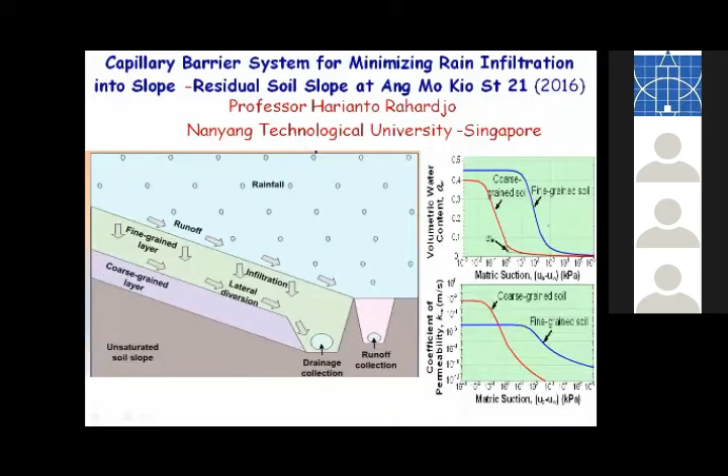Then this last situation, use of subsurface capillary barriers. If you have a capillary barrier made of a fine grain layer and a coarse grain layer underneath, with proper contrasting soil water characteristic curves and permeabilities, the water will move through the fine layer only. At high matric suctions, the permeability of the coarse grain layer is much lower. So if you have them with proper thickness and proper slope, you can maintain the flow in the fine grain layer at the top and collect it at the bottom, minimizing what is coming down to the critical slope.

So this is an illustration - I got this from Professor Rahardjo in 2019 when I met him at an international conference. In the steep slope, the material is placed within geocells: a coarse grain layer, then a geotextile layer in between, and the fine grain layer is put there. After that, topsoil was applied and it is turfed.

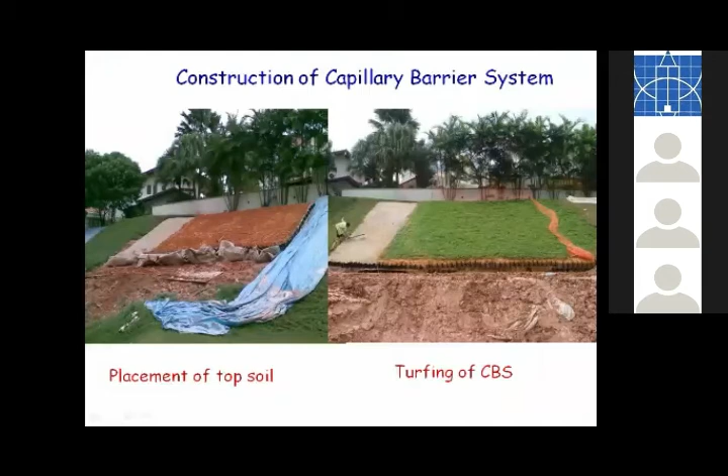And we have embarked on a study on this at Moratuwa. We have a physical model of a capillary barrier with residual soil, a coarse grain layer of manufactured sand coarse material, and fine grain sand. It is instrumented with moisture sensors in the two layers because the thickness is very small, and there are tensiometers at the layer of the residual soil.

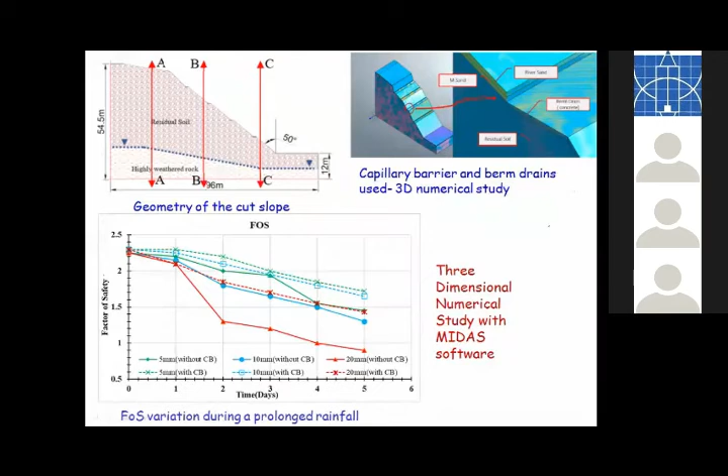In conclusion, I would say natural slopes are stable in the unsaturated state, but with rainwater infiltration, there will be many instabilities. So we can model the rainfall and assess the situation.

Slopes should be cut to appropriate angles, and appropriate surface drainage measures should be installed, and subsurface drainage measures should be installed to stabilize them. In certain situations, additional structural measures in the form of gravity walls, soil nailing, and anchoring may be required.

Now, when these measures are applied in combination, you saw that soil nailing together with draining will provide the most optimal situation. And in implementation of that, correct construction sequence must be adopted.

Whatever construction we have done should be monitored and maintained. You saw that for the Hong Kong situation, they have been continuously monitoring and detected the fault and rectified it without it leading to a catastrophic failure.

So we are very weak on that aspect. We have to monitor, implement the measures of rectification, and ensure that they are operational. So that is, we have to build and watch, but not forget after building it.

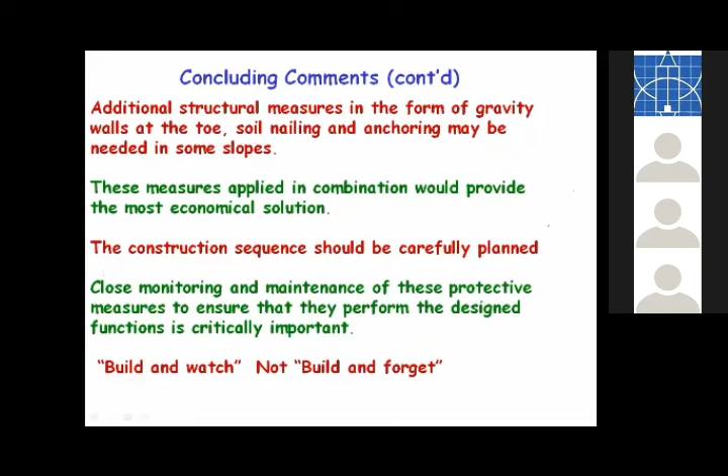So I think now we can share the video you have already prepared. Right, okay, okay. So then I wish to share a song with you.

Now here we talked about the rain-induced landslides, the water which is the most important commodity for life. Now, how can I get to the video?

There we talked about the rain-induced slope failures and how they were rectified. Water, which is an essential commodity for all forms of life, human, animals, or plant, has become destructive when available in large quantities in an uncontrolled manner. I talked about that, and this is true for many other phenomena, or certain human behaviors and characters, that can be very helpful when available in correct quantity, correct magnitude, but can be very destructive when present excessively in an uncontrolled manner. So I put these thoughts together and made this song.

My daughter Kalani is singing it. Dr. Rohan Avirasingh composed the music, and our graduate from University of Moratuwa, Milinda Amarasinghe, did the pictures. I wish to share this with you, so I hope you will enjoy it. Let's go to that. So I will conclude the presentation with that.